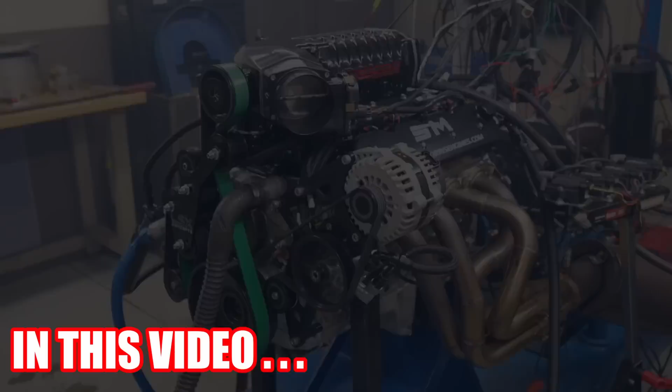Just pulled that sucker right apart, obviously, as you can see by this. All right, this stupid, crazy crap of how things go for Steve Morris. I am juror number 7.

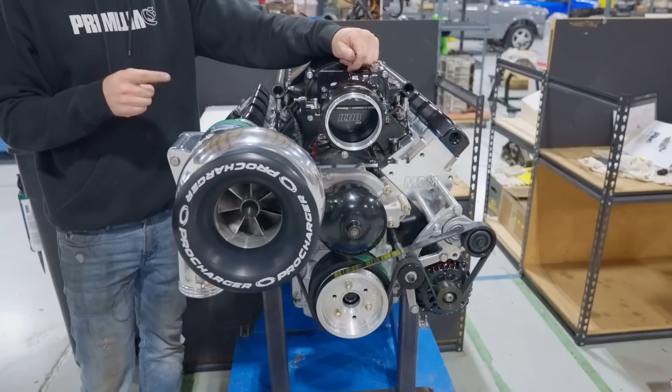What's going on, guys? I'm Kyle, you're here at Steve Morris Engines, and today we just finished up this F2 ProCharged LS for Tyler Patton's jet boat. This is a really cool unit we just got done with, making over 1,500 horsepower on E85 from the pump. It's got a water-to-air intercooler since it's in a boat, and no accessories except for this nice little ICT billet alternator.

Pretty cool engine, and not only are we dynoing this engine, but we're also dynoing this 2650 Magnuson supercharged 427 LSR block with Mast Black Label heads and an LSX Concepts drive. Nice piece for a sand car going out to California, I believe, for Mike Ledbetter.

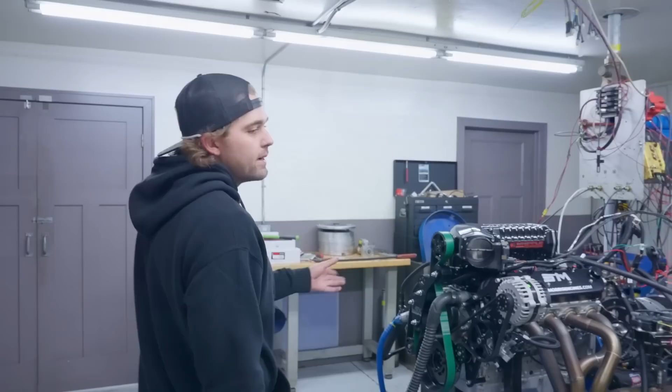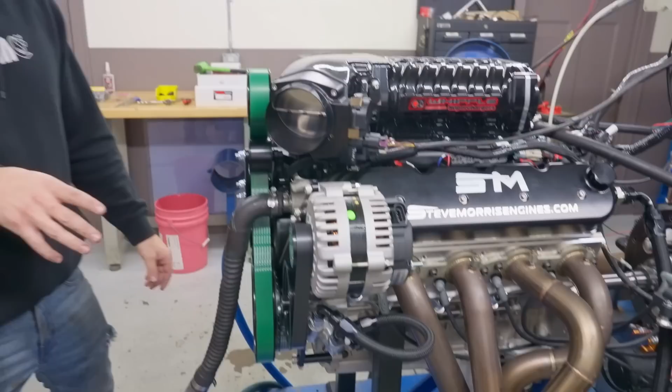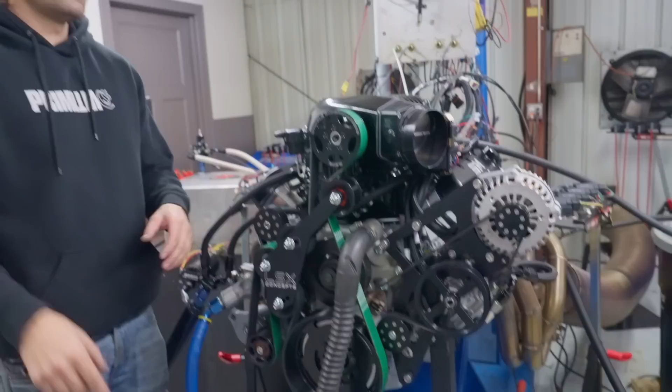So we're gonna be dynoing this shortly, but not before I get done with this. Here we've got a 427 all aluminum LS, basically a clone to Ledbetter's out there, LSR block, Mast Black Label heads. This one is a wet sump, not a dry sump. You can see this one's got a 3-liter Whipple on it with the LSX Concepts drive. It's very similar to that engine out there except for the blower, so it'll be interesting to see the difference between these two blowers, 2650 versus a Whipple 3-liter Gen 5. So let's get into the video.

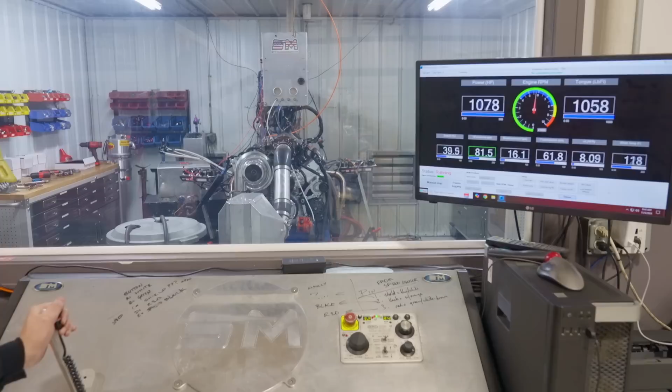Okay, finally we were able to make some kind of decent horsepower number on this thing. On this engine, unfortunately, I had to swap out coils, spark plug wires, coil wiring harness, the coil extension harness because I thought those were bad, ECUs, tunes, new main wiring harness. I tried everything and could not get this little phantom rev limiter out of it. That was just killing it.

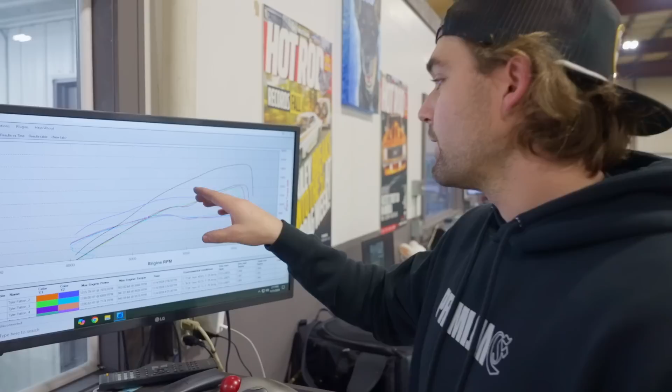You can see the difference in the graphs. This black line is the pull I just made, and these really bad graphs, 3 or 4 of them, are what had happened prior. What it ended up being was a software issue. All I ended up doing was re-uploading version 400 off of Holley's website. There was something wrong, something got missed or messed up in the software, let's just put it that way.

So I put new software in it, new tune, started from scratch, and it fixed it. That's what I'm chalking it up to be, and I've heard of that happening before. Me and Tom Vigou actually talked about it before on some other Holley software issues, but that phantom rev limiter, sometimes you just need to redo the software, put the newest version in if it's got an old version, or redo the new version that's in it.

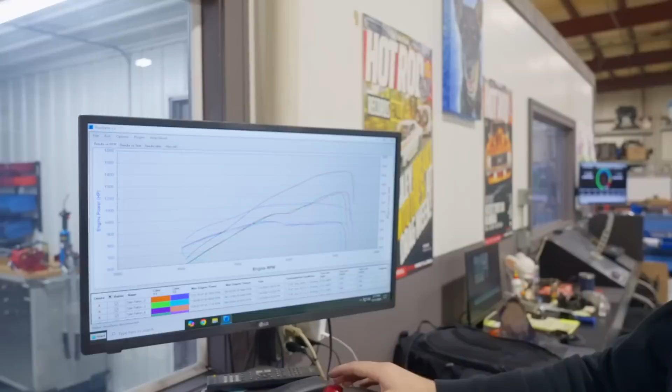So we're up here, we're at a good number, 1445, so we're getting close. I'm going to put some more timing in it. That was pretty low timing, I think that was like 20 degrees or something. So we'll mess around with the timing and try to get it over for them.

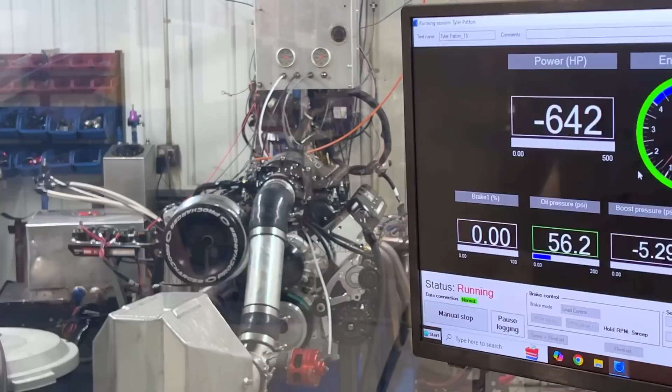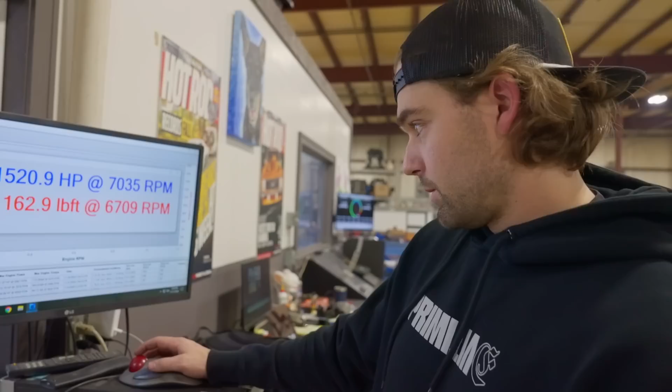All right, finally we got to our 1500 number. It's been a long battle with this engine. I think it says somewhere we're at like 20 pulls on this engine, and this is on this dyno. I actually swapped dynos because on this engine the starter went out on that dyno and we didn't have a replacement. Rather than wait 2 days to get another starter, I put it on this dyno. So I had probably 5 pulls on there, so we're like 25 pulls into fixing this thing.

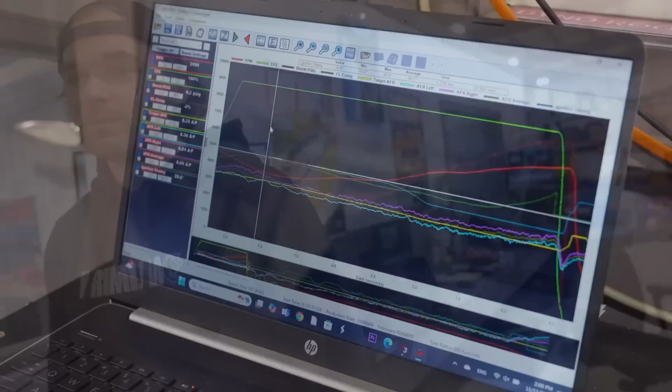Disaster. But it's finally done. Everything runs good, the data log looks clean. So let's look at that. All right, so we got our data here, everything is looking nice and clean like I said before.

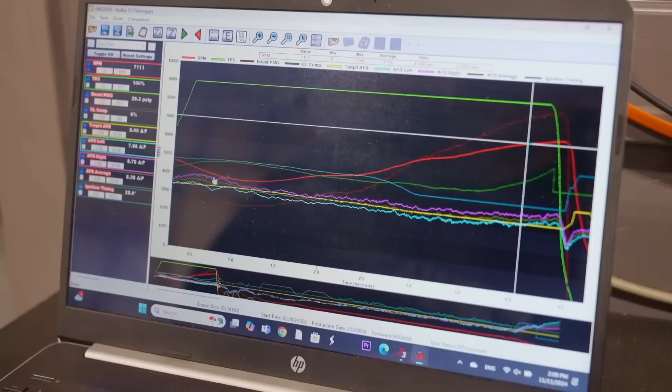Closed loop, we're not adding or subtracting more than 5 here, so that's all good. Boost, we're at about 28 to 29 pounds of boost. Air fuel, nice and safe. Timing, we're at 25 degrees. I've tried this at the same boost and the same fuel at like 27 degrees up there, and it didn't pick up any horsepower. In fact, it lost 1 horsepower. So we kind of hit a wall on that, went back to 25 where it's nice and safe and where it made the most power.

It also made 1520, and that's at 7,000. If we go back on the graph, you can see it's at 15 down there at like 68 even, so it's nice and flat up there, which is what we want, because in a jet boat like what Tyler's got, we can't spin the pump faster than 7,000 RPM. 7,000 RPM is the max speed you can spin that pump. So he's gonna be real happy with that. I'll give him a call real quick and we'll see what's up.

And we'll get on to the next one.

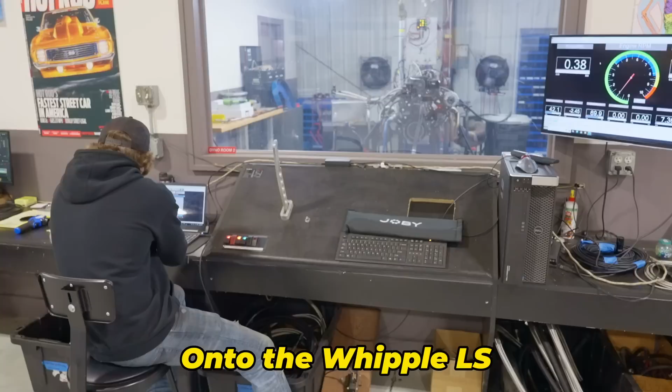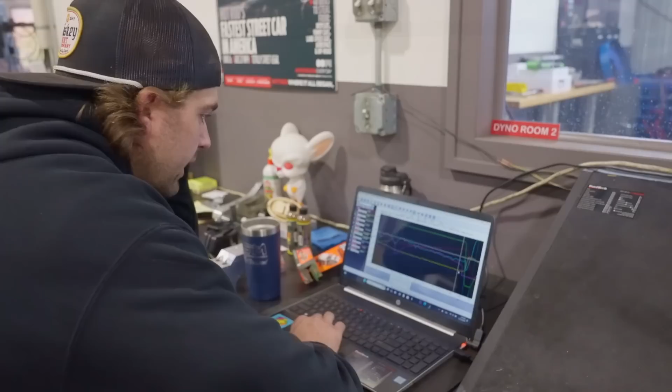So we just got done with our preliminary pull on this thing, not revving it up super far, just creeping up on the tune-up, making sure it is where I think it needs to be. And things are looking pretty good so far. So we are at 906 horsepower right now, and on that pull I went to not even 6,000 RPM. That was 5,800 RPM.

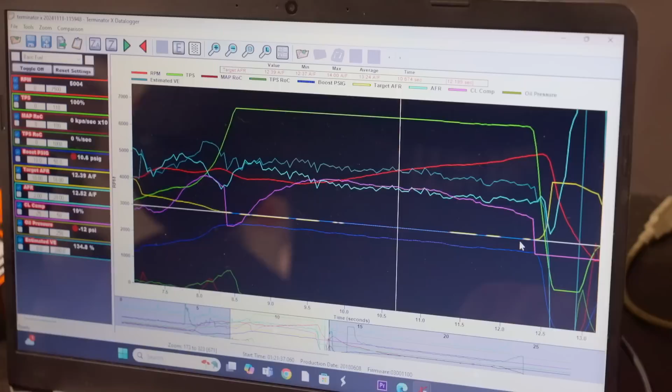We're at 10.5 pounds. Typically, pretty much every positive displacement blower, as soon as you're wide open throttle, it's making full boost, as shown by this solid blue line that is perfectly level. So typically they do not pick up with RPM like a centrifugal does. But I think we'll probably end up putting a little bit more boost to it.

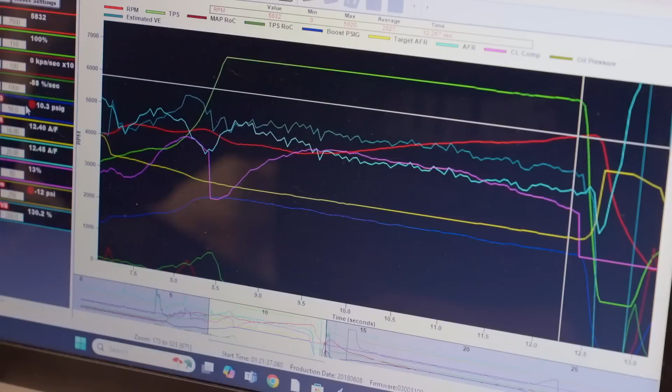Power goals on this engine are between 1,100 and 1,200 horsepower. I think we can do that on pump gas. We should be able to do it. Just nice and easy, safe tune. No reason to get crazy with it.

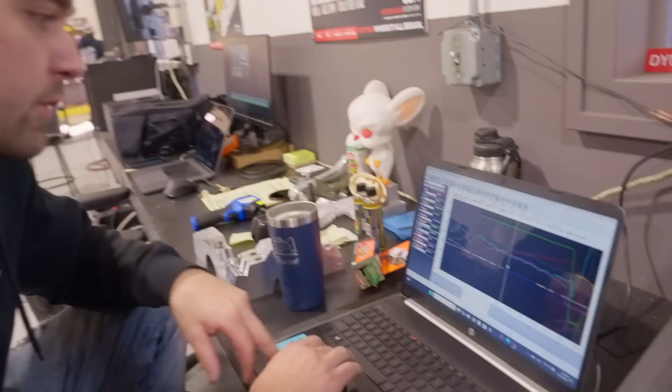So our closed loop is adding some fuel, so I'll do some corrections on my tune-up in here, get that all cleaned up. 19 and a half degrees on timing, so we'll probably throw some more timing at it as well. Something like this I would probably expect to be 23 to 25 degrees ultimately. So 19 and a half is a good start.

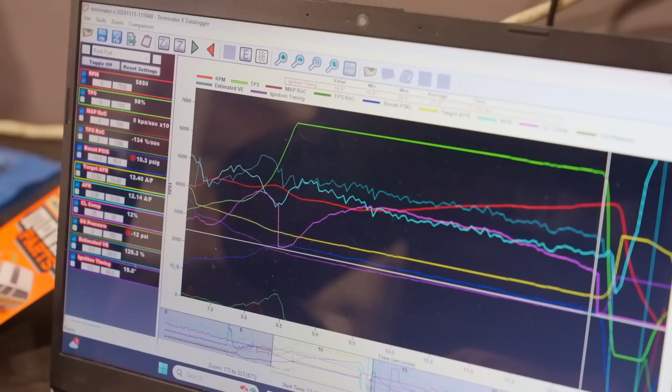So we'll go in there and look at the plugs, make sure everything looks good, and then we'll turn it up.

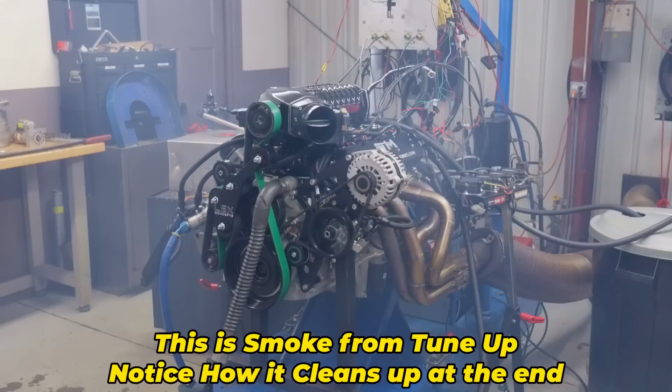You guys saw that was a nice clean pull. Well, say clean, it was pig fat rich, it's smoking up the room. But we're at 1021 so far, so let's go in and look at the plugs.

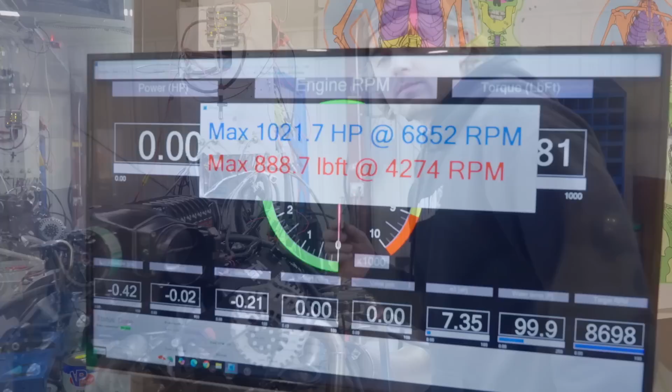All right, we're definitely piggy fat rich, but our timing is still plenty safe. We're not even off of the strap yet. The porcelain is still dirty, so we'll lean it up a little bit and put some more timing to it.

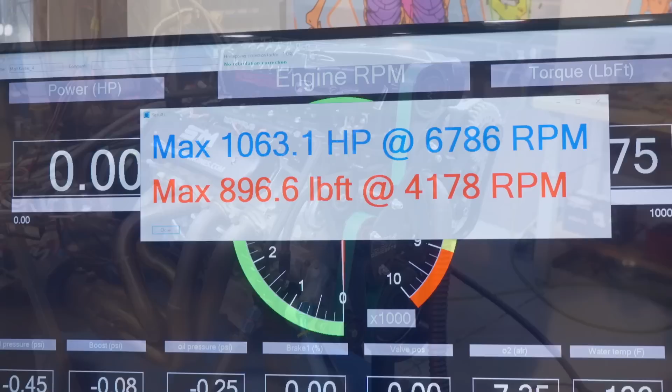Plugs say they're still plenty rich, which is funny because our air fuel is actually where I thought it would be, a little bit lean. We're at 12.7 on our air fuel right now, 25 degrees of timing. So it still looks like it'll take a little bit more timing.

I would have figured that it would have picked up more. So we went from, what did I say it was on the last pull, like 22? 19? Yeah, so we went from 19 to 25, which is right where I thought it would be. And it still looks like it'll take more.

We're not even off the strap yet, just like before. You can see that we're making our way off of the strap. The pull before this, we were like up here. Now we can see we're right here. So we'll put a little bit more timing at it still and lean it up a little bit more yet.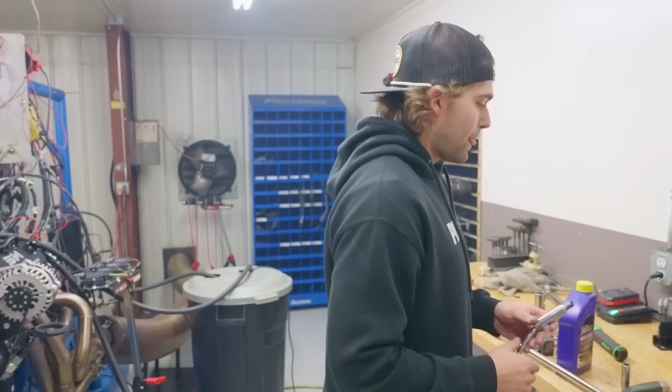I think that it didn't look as sooty that time, did it? It was less sooty, right? Slightly less sooty. I don't know, every time I do one of these it will always push a little bit of soot back out of the exhaust, just because it's moving enough exhaust and it's not sealed up good enough down there that it will push exhaust back into the room. So that could be some of it too on something like this.

But we'll keep leaning it up until the plugs look like they are supposed to look. So we'll try it then.

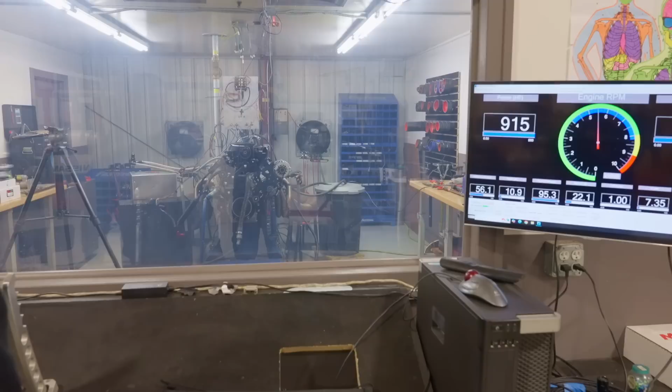All right, 1089, 7,000 RPM. We are getting closer and closer to where we need to be on this thing. So I'm gonna go take another look at the plugs, and we're gonna do the same exact thing as we just did. Make sure the plugs look good, put more timing in it, less fuel, depending on what the plugs look like. And I'm sure with this next change, given how much we've increased every time I increase timing, we should be at 1100 here this next pull.

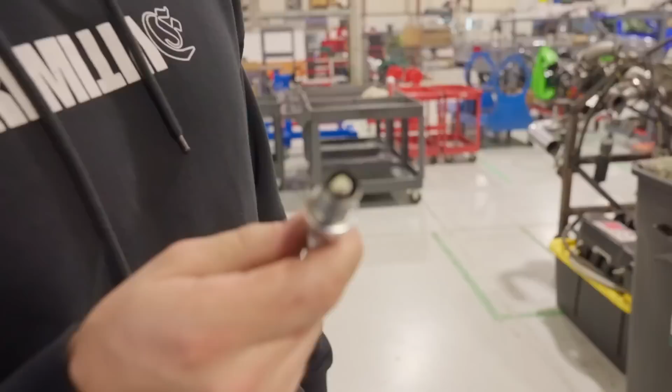Now that is a happy looking plug. Timing, we could put a little bit more into it. You can see that we're just starting to work our way off the strap right there. Porcelain is looking nice and clean.

It's really hard to see on camera, but our fuel ring is like right about here. So that's looking good, and I think I'm gonna leave everything how it is for the most part. Maybe just add a degree or two of timing and then let it cool down for a minute, and we should be at 11. Let's try it.

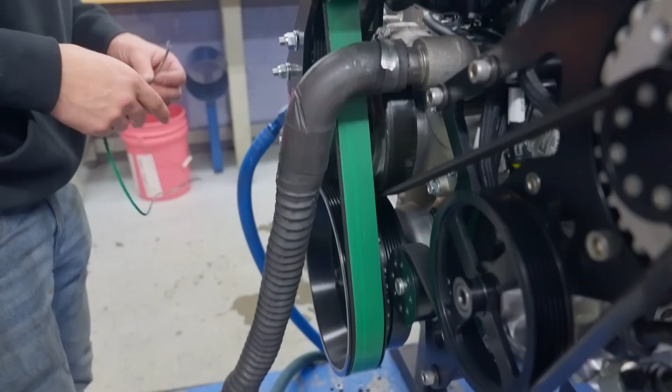Just a little bit. It perfectly stripped just the edge off of it. It must have just a little misalignment somewhere on there that caused it to do that.

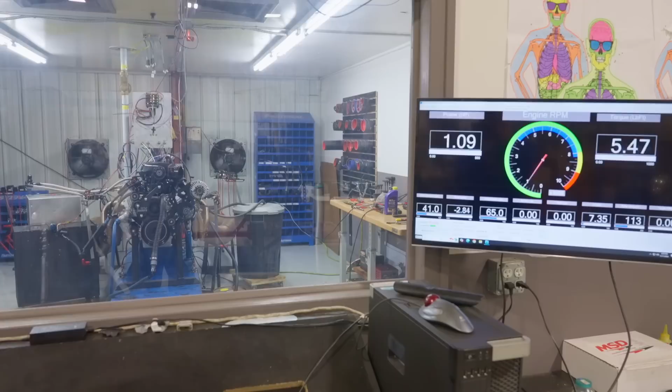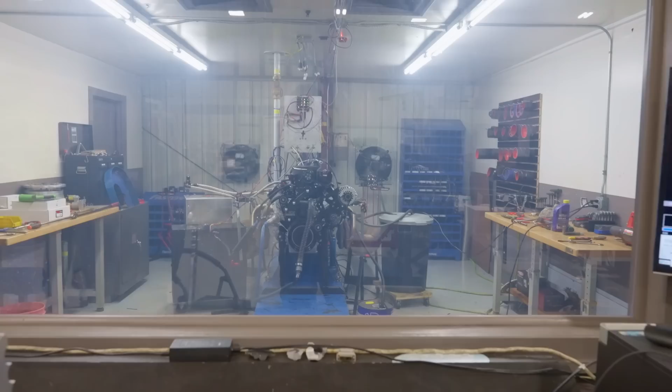So you can see that it pulled the belt right apart this way. So I think when it chewed that one edge off of it, maybe something happened where it got weak or something, or cracked the belt, or I don't know. Just pulled that sucker right apart, obviously, as you can see by this.

So unfortunately, we don't have a new one right now, and we need to get this done today, so that sucks. But I don't know, just have to get another one, see what we can do.

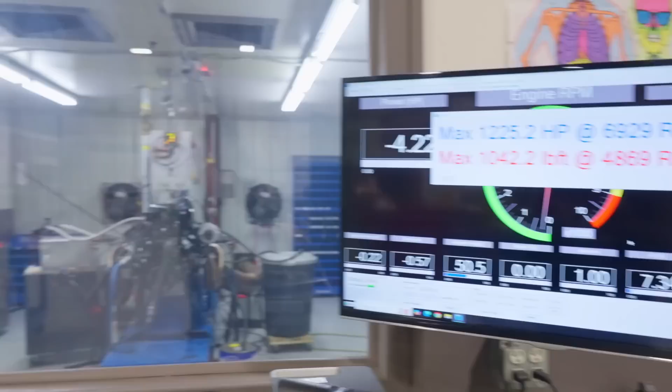That's pretty good, we're within what the customer wants for horsepower, and that's on the ethanol tune. You guys saw the pump gas tune, it made like 1140, 1150 or something like that. So pretty happy with this thing. I think it's time to move on to the next one.

So it is, you're seeing this on Tuesday. This is Monday night, and I've just gotten back to the shop. Let me explain what's going on.

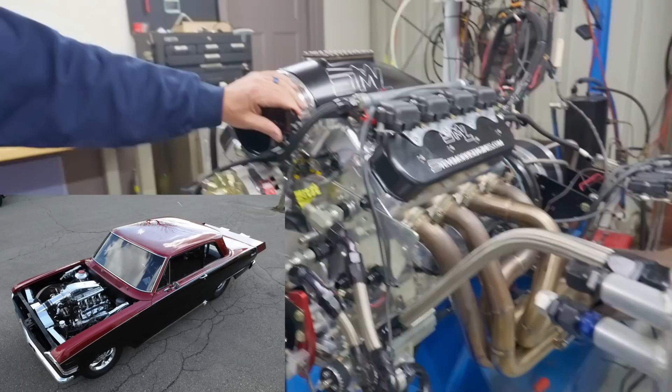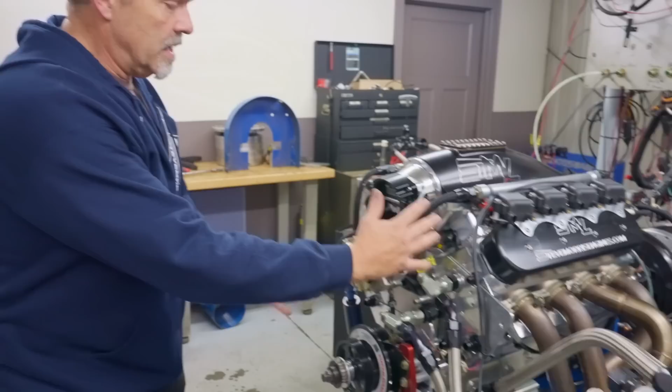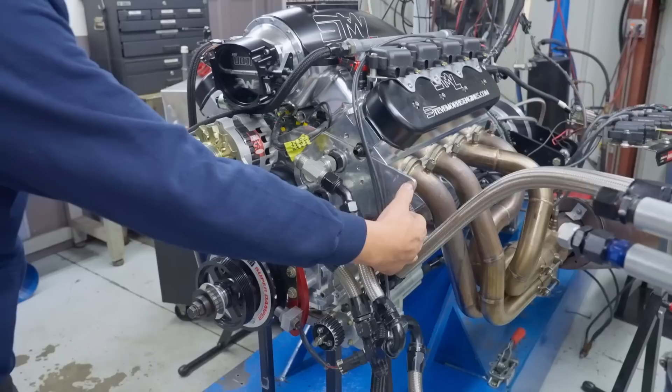And this is the one that we had to do. This is the original LS motor plate off his old engine. What we did is we didn't modify anything here, we made it so we're trying to make this so it drops right in. Saves Rob a boatload of time so he doesn't have to reinvent the wheel. I'm paying the consequences, so he doesn't have to reinvent the wheel making everything fit and work and figure it all out himself. We're getting the alternator in the same place, the same pan and pump. You have to make a little modifications on that to fit the SML, but you can see here it will all fit and work. And the headers are the same, okay, so your hot side, cold side, if it's a standard deck block, are gonna all fit. It's all the same, it's very, very nice.

Common questions that people miss, I don't understand why. It is a fully water jacketed block. The entire block has water all the way around it, the heads have water all the way around them. I tried to explain to you and show you that it just doesn't have water that goes through the block to the head, it's all external. So if it ever has a head gasket blow, it will never spray water out on the ground. We've seen on the other SML over there how excellent the head gaskets look, just so spot on the money, perfect, because of all the clamping load force. And even if it did have a problem, it wouldn't have a water problem. Can't pressurize the coolant system, can't do any of those kind of things because there's no transfer in between the head gasket area. But the block has full water in it for drag and drive thousands of miles, cylinder heads have full water in them, drag and drive thousands of miles. I know a lot of you guys know that, but I keep getting the same questions over and over again.

All right, so this thing, Kyle's going to have to run this tomorrow is my goal. Let me explain to you why Kyle's going to have to dyno it. Now we're just running NA because we want to see the tune, or just get things running, make sure the oil pressure is fine, make sure there's no leaks, make sure everything's nice, because it's going to have to go in the car in a very elaborate system in the car. And that's why we maintained and hooked everything up the way it is. So Kyle's going to have to run this tomorrow because I wasn't here today until tonight.

Why, you might ask? Well, let me tell you. I got called in for jury duty. Now, I've been called several times, never had to actually go. So we call in, yes, I need to report. I said, okay, fine, whatever.

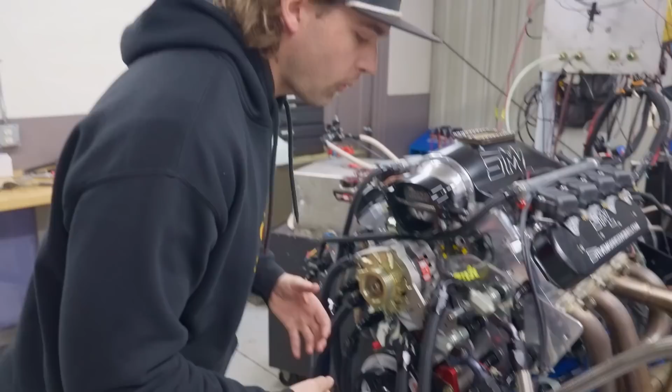We're here, I've got this SML. Basically it is ready to run with our dyno setup on it. We're not using his coils, we're using our smart coils, our Holley harness, Holley Dominator. Everything is set up and ready to run on this thing, but we do not have something very important: this belt that goes on this little pulley right here that happens to spin our oil pump.

So unfortunately I don't think it's going to get here today. It's kind of late in the day and it's not showing up yet, so it's probably going to be in tomorrow, unfortunately. So we're not going to be able to dyno this today. I told Nate that as a cameraman, he just needs to get in here and spin this oil pump with a drill while I do the dyno pull so we can get this done, but he wasn't willing to do that.

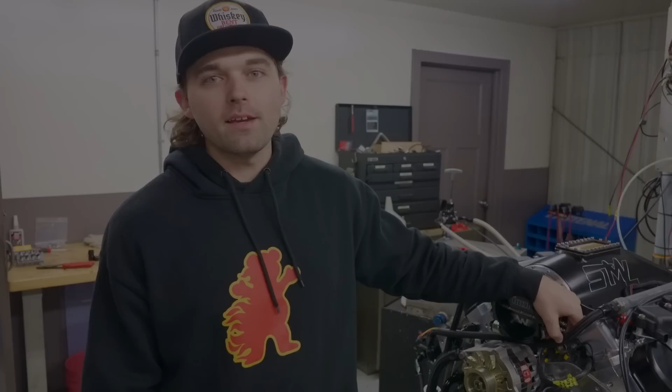Obviously we had the plow truck in here because you'll see that it's snowing outside. Yeah. This is real, it is the real deal. I'm still trying to contain my story. I've only told 3 people. One of them here. Really? Yeah.

Already got the kind of stuff on it. Is this Spohn? Spohn suspension parts. Yeah, I've got that on my Escalade.

Wow, is this like what they call the 3SS package or 2SS? I can't keep up with it anymore. Oh, I don't know, I still have the window sticker in the glove box. I'm going to detune it just a little bit for you. Yeah, and I'll probably just leave it there. It'll make it super safe and easy, and I'll go over all the buttons here for you.

What they all do - I won't activate the nitrous just yet until I get some more formal training to take it to the track. He'll probably be the one that takes it.

Okay, yeah. All I did was, and I got the actual hoodie out there, I brought it with me. I got home on my last home time before this, and it came up on the Facebook feed. Of course I saw it on YouTube, and then I saw it again on Instagram. I'm like, I'd like to win that truck. I was just sitting there talking to one of my other sons - I got 7 total. He's the oldest of... well, no, not 7 sons, let me correct that - 4 boys, 3 girls.

So I'm like, that truck would be cool to have. I was already looking for the Saab 9-7X Aero, which was basically a twin to this. And so I'm like, you know what, let me just try. I had just gotten paid, so I went ahead and did the thing on the phone. It routed me to the web page, and I wanted a black hoodie, but I couldn't get that, so I just took the blue one. Ordered it, and it got there before I went back. I'm like, man, that's fast. Yeah, cool.

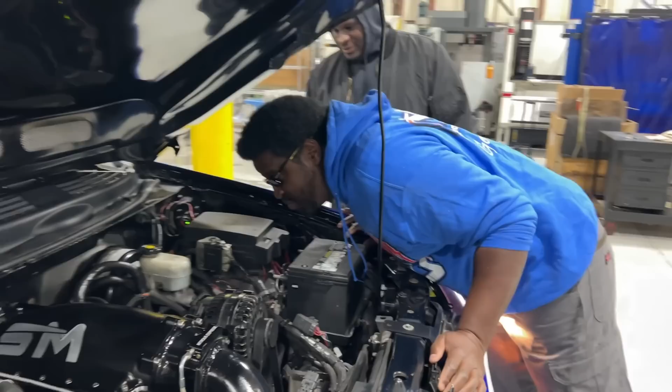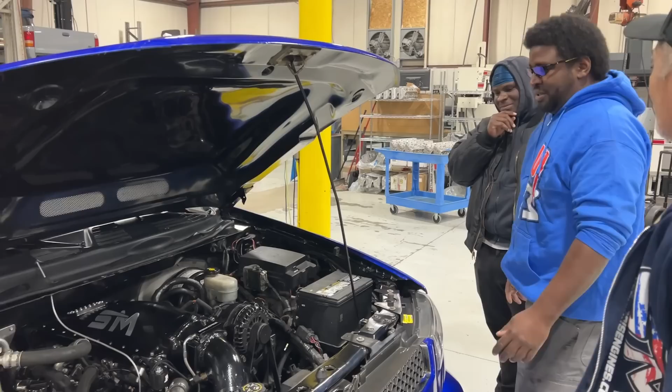It's got the Gen 2 coils on it still - I still got a pack of those at home. You don't have to buy new coils, all the coils from GM were good. Yep, they came on the LS2s originally, so that's what I do know. The ones I got on my Escalade are D510s, and I actually upgraded and put LS7, LS9 valve covers on my Escalade and on my Yukon, so I could run both styles of coils on there. It just made it easy - I kind of didn't like the bracketry deal, so I'm like, I got you, it could simplify things, and GM did that. So I'm like, let me make that investment and just put it on here.

Sure, and that's still clutchless or clutch whatever, or is it just a cover one? No, that's just a little cover. So it's all - wow, that's one hell of a damn balancer. But it's all still easy to work on.

Wait, are those turbo headers or just - no, there's stock manifold on there. Really? Yep, yeah, she's not getting touched, I'm not doing that to this. No, I don't have to.

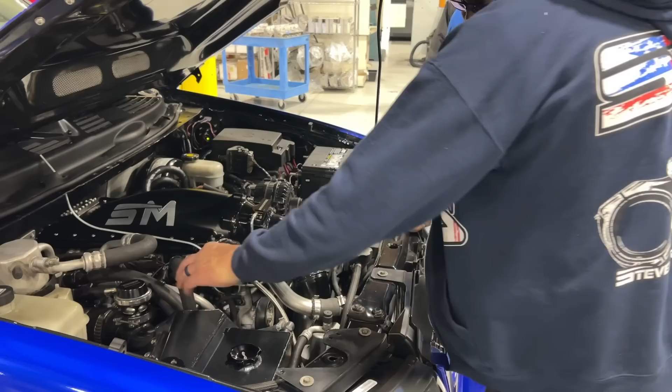We're getting a little bit good at welding ourselves - my oldest daughter is actually a better welder than me now, she actually went to school for it. Awesome, I told her she's gonna build an exhaust for me. Awesome. And this is - that's the intercooler right here. Yeah, whoa.

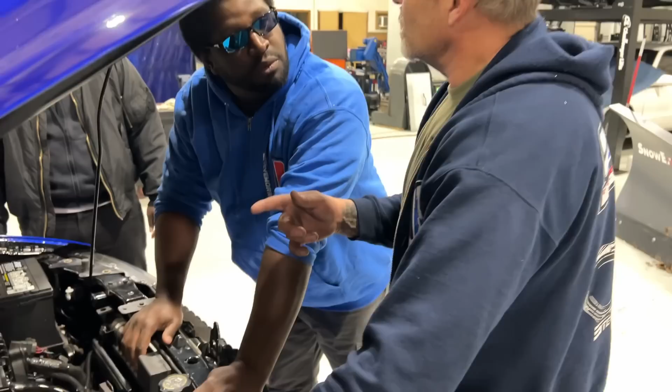This is kind of like looking at a second gen Typhoon or Syclone, and it's water cooled. So this is a heat exchanger style intercooler. This is actually the tank, and the pump is down in front, and the front radiator that's up underneath the chin spoiler grill is the cooler. So instead of having air to air, it's like any other Whipple or Magnuson supercharger kit where they have a heat exchanger. The intercooler has air going through it, and the water's keeping it cool, and the real radiator up front is cooling the water that gets heated up by the turbo.

It's got electric fans on it. So, man, everything works on this thing, AC and all.

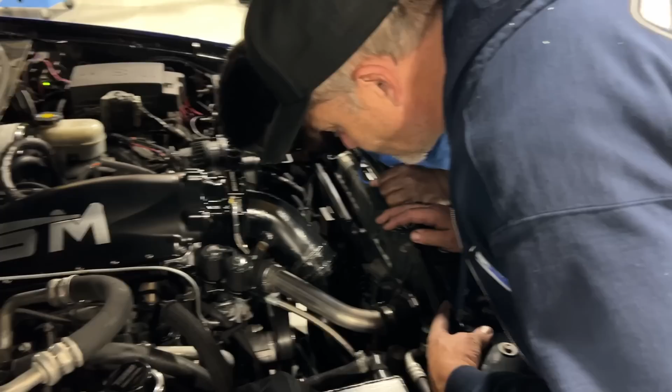What kind of transmission cooler does it have? Still runs into the radiator? Yep, the radiator. I'll be upgrading that then.

I thought I had to do much to it. I definitely want to put the big brake package on here for sure. Oh yeah, the Escalade, that would wear Wilwood, nice. Yeah, and I put factory 21 and up Tahoe PPV brakes on the Yukon with Corvette C7 non-Z51 package road calipers or whatever, with 14 and up 14-inch rotors on the back. Everything bolted right up too.

Helped me install it and bled the system. We took it on a test drive and found out the 4L65 just laid on its face, wouldn't get above 30 no more. So it's been sitting ever since.

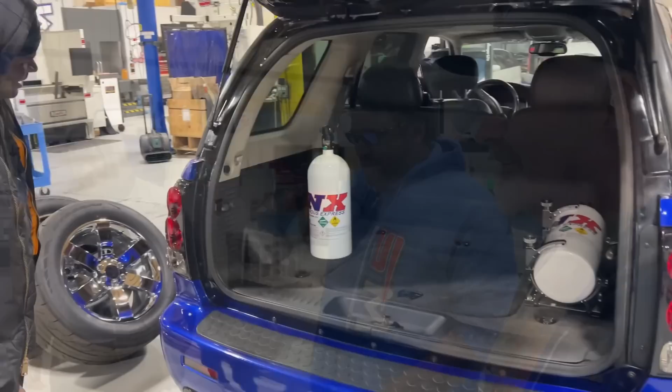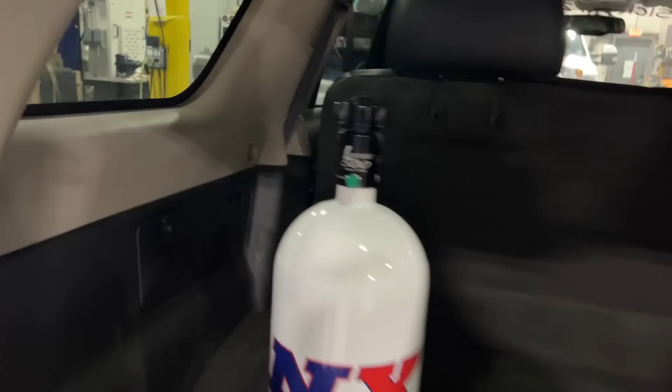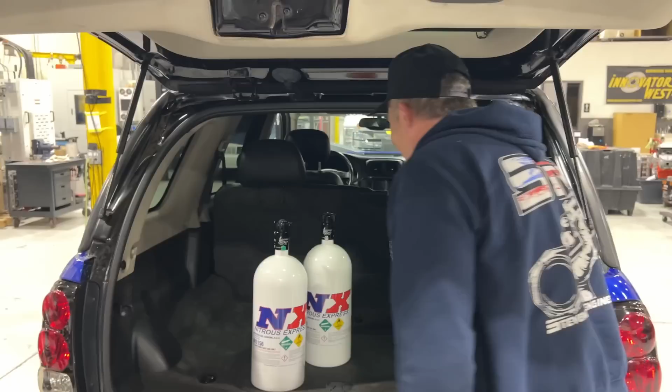Two Nitrous Express bottles for the kit. Oh yeah, this one is stone cold empty. I think you robbed the full bottle from me. This has probably not got much. This is empty too, what the heck? I was gonna show it for his recent testing tune where the engine broke in the Mustang. Guys didn't want that bottle anyways. That bottle's got torch marks all over it from heating it up with a torch, you don't want that bottle. Those ones are nice, brand new bottles - when they're full it does a really cool purge and the whole deal.

So what I'll do is go through and show you all the stuff, how to drive it, how to run it. It's as easy as you can get honestly - if you're just gonna drive it and go around on it, just turn the key and go drive it, that's it. But if you want to race it, I'll show you how to do the 2-step button, how to do the nitrous purge. We'll set up a completely separate tune for the race that you can download into it, and then the regular street drive, just driving like normal.

Yeah, I don't see that happening. So what, driving like normal, or yeah driving? No, I don't see that happening. I'm sorry, I'm 47 years old. You're only 26, 27, how you forget? We go first, I've got 7 of you. Yeah, well, y'all you're 28 now. So yeah, it's kind of hard to keep track with that many. The youngest is what, 14? Not 13, see? So they go with it.

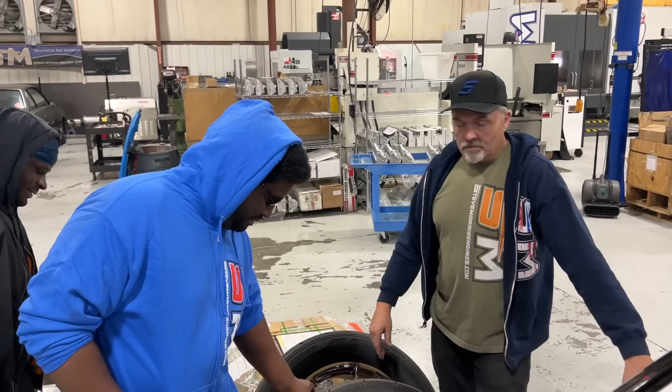Yep, so this is just the hard tire. These are a taller tire, right, but they just bolt right on and they fit. So if you go to the racetrack and they want you to run those, you'll just knock them off - these are gonna be a lot better bet to do that with.

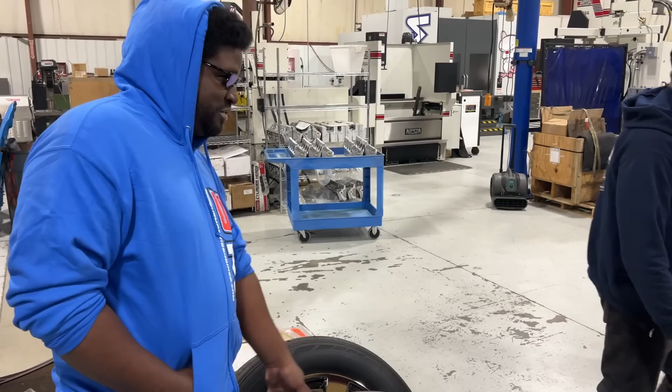And I got friends that I grew up with years ago that got into this because of their fathers and everything, and I need to definitely stop by and pay a trip to them now. I ain't seen them in years. Yep, see how they're doing, see what they've built recently. Because they were getting into the nitrous and the turbos and stuff too. I couldn't do that, I was busy raising my family. No, that's cool man, now it's time to play.

All right, so I'm gonna start showing you how to get everything, or how this thing all drives, and then we'll come back here in just a minute.

All right man, you be careful and have fun. Happy holidays. You too, and yours. Oh man, the reflection looks awesome in your glasses, it's the right color blue. These are prescriptions? Oh really? Yeah, yeah. All right buddy, take care. Yes sir, call me. I will, all right.

Now, thankfully for him, there's no snow about 40 minutes south of here, all the way down to Georgia. But he's gonna have to drive that thing in the snow, which sucks. I'm sure he'll stop and wash it.

And there you go, one bad Trailblazer, and I think he's really gonna love that thing because it is nice. I'm Steve Morris, have a great day.